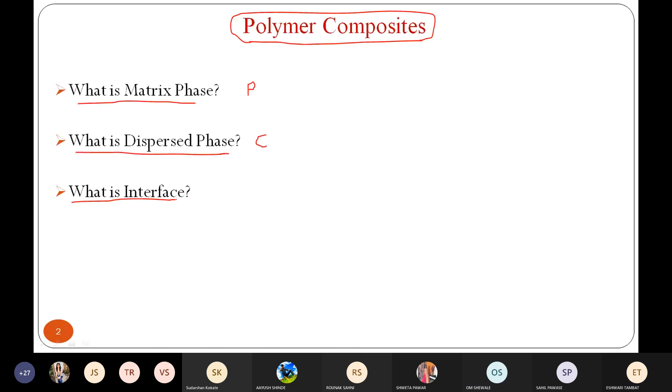And the last concept is interface. Interface means the boundary between the matrix phase and disperse phase. This question is sometimes asked in MCQs for match the pair. So matrix phase is matched with polymeric material, disperse phase is matched with composite material, and interface is matched with the boundary between the matrix phase and disperse phase.

Right? So is that clear? Yes. Yes. Okay, yes sir.

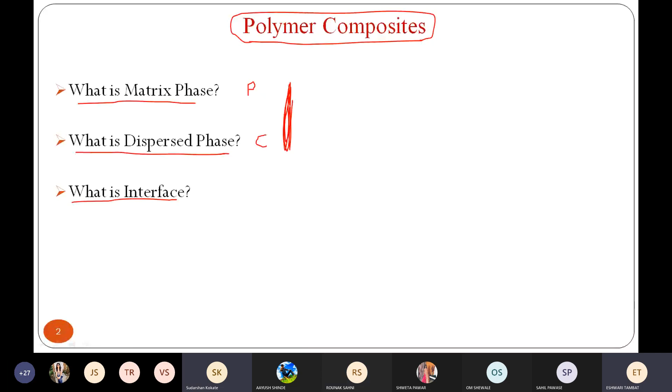Now the next important concept is constituents in the polymer composite. There are two different types of constituents present in polymer composite. The first important constituent present is the polymer matrix phase. Polymer matrix phase includes only metals and polymeric materials used as matrix material - metals like aluminum, copper, and commercial thermoplastics and thermosetting plastics are generally used as matrix phase. The thermo-softening type of plastics and thermosetting type of plastics.

In the previous class, I already explained the concept of thermo-softening and thermosetting polymer materials. Thermoplastic examples include polyamide, polyolefins, polyphenols - these are thermo-softening type plastics, meaning on heating they can be molded and regain their original position. Thermosetting plastics cannot be reused or remolded - once heated, they undergo permanent deformation. That is thermosetting type polymeric material. The well-known examples of thermosetting polymeric material are epoxy resin, phenolic resin, and polyester - these are thermosetting type polymeric materials.

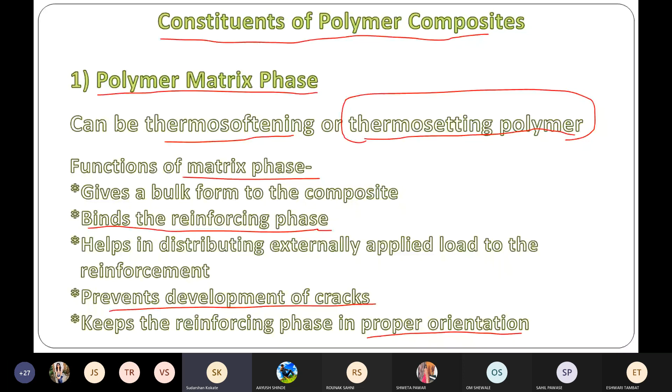Now important MCQs will be asked on this constituent. The first MCQ will be like: in polymer matrix phase, dash dash is used as a constituent. The options are thermosetting plastic plus copper, or thermosetting plastics plus aluminum - metal plus polymeric material. This is used as the constituent in the polymer matrix phase - thermosoftening plastics and thermosetting plastics plus aluminum and copper. These metals are also used in the polymer matrix phase.

And in the disperse phase, or reinforcing material, dash dash is used as a constituent. The constituent is aramide, glass, carbon, silicon carbide, aluminum oxide, boron - some fiber reinforcement material. This is used as a constituent for the reinforcing or disperse phase in the polymer composite. These two types of different questions will be asked.

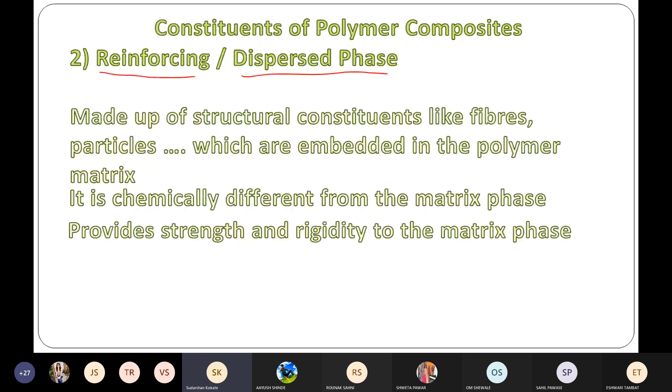Is that clear? Now the next important concept is classification of the composite. Based on reinforcement, composites are classified into three main types: first is fiber reinforcement composite, second is structural composite, and third is particulate composite. These are the three important types of composite. Fiber reinforcement composite is again of three types. Then structural composite is of two types: sandwich and laminar. And third is particulate composite. This is the classification of the composite.

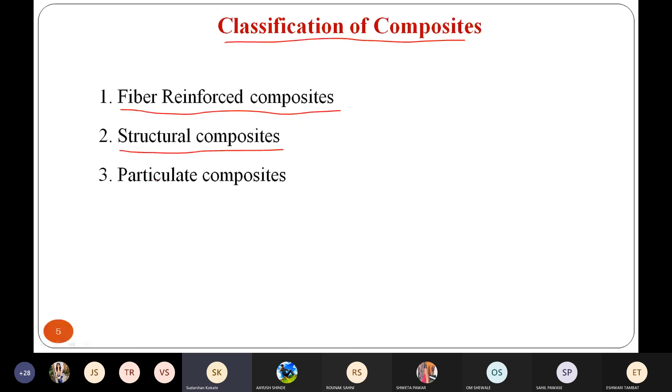Now we will see the first one, fiber reinforcement composite. These fiber reinforcement composites are composed of fibers, which are embedded in a matrix material. The well-known examples are glass, carbon, and aramide fibers. Fiber reinforcement composites are further sub-classified into three main types.

The first is continuous aligned - meaning the arrangement of the polymer chain is in parallel order. The second type is discontinuous aligned, where the polymer chain is parallel but not in continuous mode - there is a break in the polymer discontinuous alignment material.

Then the third is discontinuous randomly oriented. Here the polymer chains are parallel as well as in lateral order, but their direction varies from layer to layer. This is called discontinuous randomly oriented - this is an important one.

Mark this as important - this question will be asked as a match the pair. Suppose diagrams A, B and C are given, and we have to match them. A is matched with continuous aligned. B is matched with discontinuous aligned. And C is matched with discontinuous randomly oriented. This is marked important - it will be asked in the MCQ to match the fiber reinforcement composite on the basis of their figure. Is that clear up to this point?

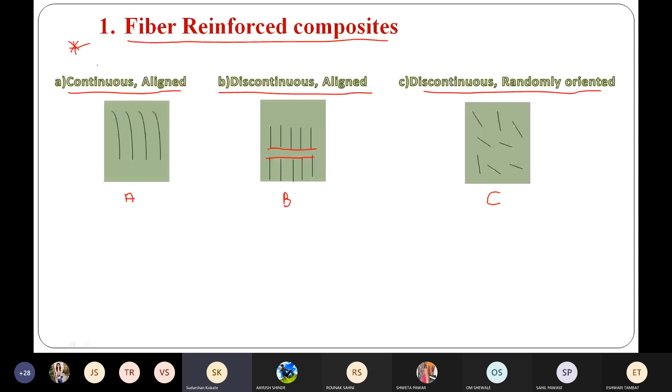Now the next important point is structural composite - the second type in the classification of composite material. Properties of the structural composite depend not only on the constituent material present in the polymer, but also on the geometrical design formation. So there are two different types of structural composite: the first is laminar composite, and the second is sandwich composite.

The first type is laminar composite, and second is sandwich composite. An example is plywood - plywood is an example of laminar composite material. Their direction also varies from layer to layer in laminar composite, and this material has very high strength in a particular direction. Sheets are arranged in such a way that the direction of their strength varies from...

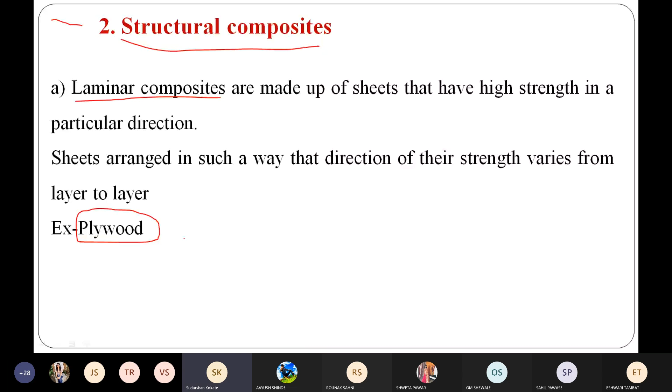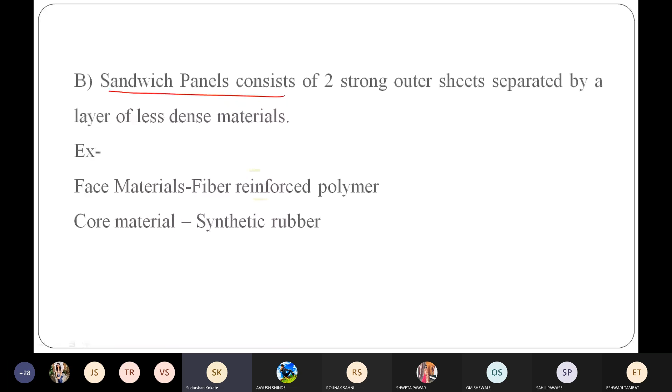Layer to layer. Then the second type is your sandwich panel, which consists of two stronger outer sheets separated by a layer of less dense material. The well-known example is fiber reinforcement polymer and synthetic rubber. This is the two different types.

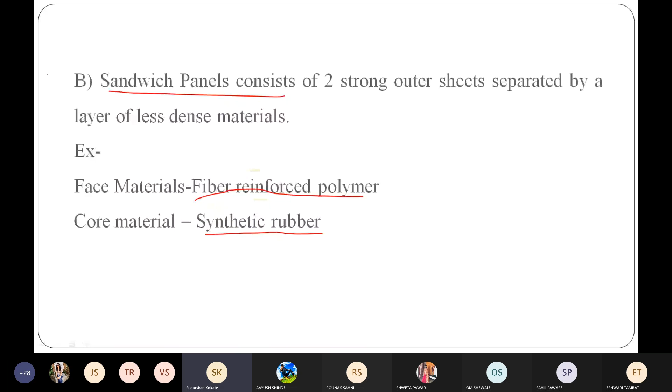I think up to this point in the previous class we have completed, right? Yes sir. Now the third important type is particulate composite.

These particulate composites are composed of particles which are distributed or embedded in the matrix body. These particles may be in the form of flakes or powder, like carbon black powder or reinforced rubber. This is the example of particulate reinforcement polymer composite.

These are composed of particles distributed or embedded in the matrix body, and these particles may be in the form of flakes or powder. The well-known example is carbon black reinforced rubber. This is the classification of polymer composite: three different types, that is fiber reinforcement, structural composite, and particle composite.

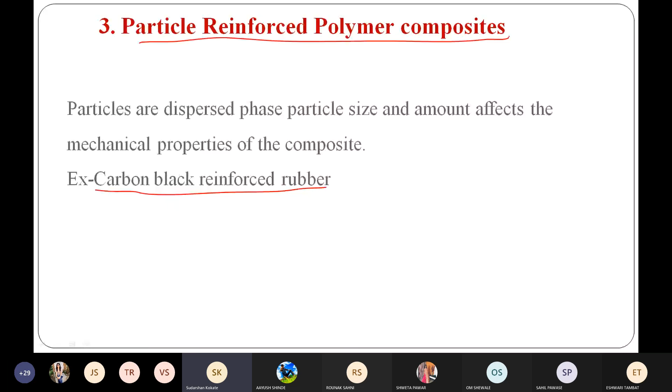Now the next important concept is the different properties. Due to the uniqueness in the properties of composite material, it can be useful in different fields. So what are those properties? The first property is that composite material is also having high tensile strength.

Why does composite material also have high tensile strength? Because we are adding different constituents into the polymeric material, and due to this it can impart certain definite properties into the polymeric material, and therefore it also has very high tensile strength.

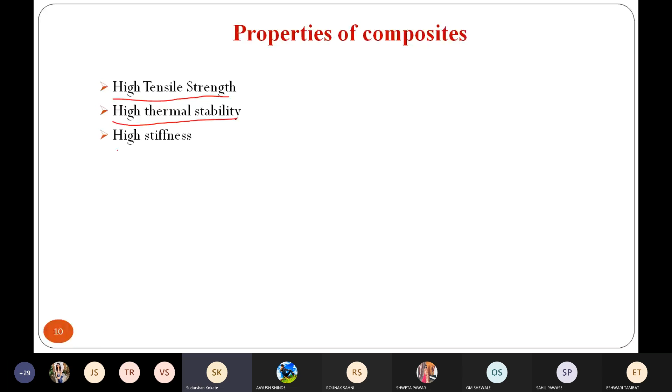The second important property is that the polymeric or composite material is thermally stable. This is important. Then this composite material also has high stiffness, meaning in Marathi we call it 'kadakpana'. So this polymeric material also has high stiffness as a mechanical property of composite material.

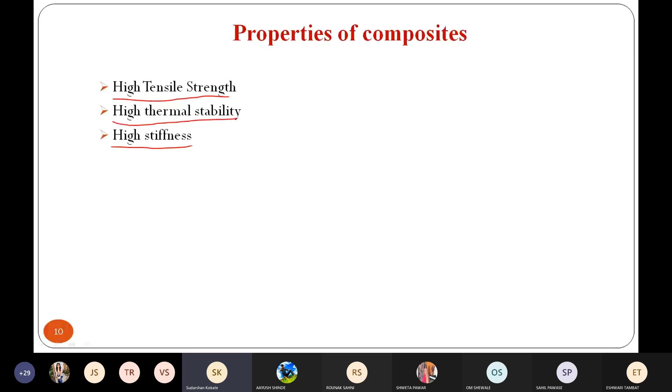Then this composite material also has very low thermal expansion. Again it is highly resistant, that is oxidation resistance. Composite material is oxidation resistant, and this composite material is also abrasion resistant.

What is abrasion? Abrasion relates to the swelling property of the polymeric material. For example, for making shoes we can use a leather sole, right? Leather is more abrasion resistant because it cannot easily swell. But if you use another sole instead of leather, it cannot resist because it has poor abrasion resistance.

Similarly, the properties of composite material also include very high abrasion resistance. Abrasion means the swelling property of the polymeric material. So this is an important and interesting property of the polymeric material.

I will again repeat the properties of composite material: it has high tensile strength, is thermally stable, has high stiffness as a mechanical property (which we call 'kadakpana'), has low thermal expansion, high oxidation resistance, and is highly abrasion resistant, which is the swelling property of the polymeric material. These are the important properties of polymer composites.

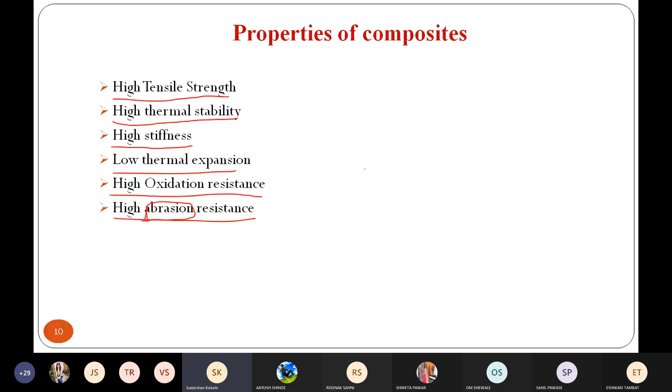Now, types of fiber reinforcement polymer composite. This is important; MCQs will be asked based on this. There are two main important types of fiber reinforcement polymer composite, FRP. The first one is glass fiber polymer composite, and the second one is carbon fiber reinforcement polymer composite. These are the two important types.

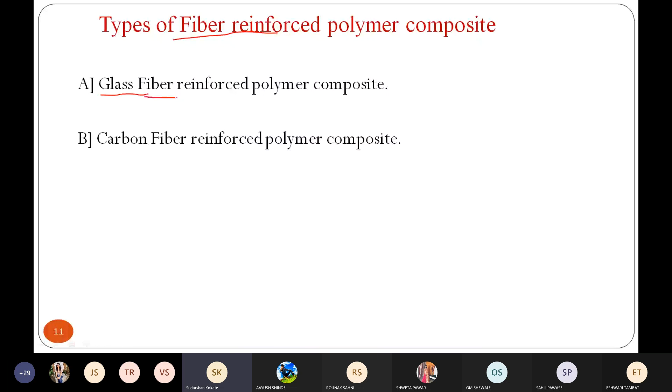Now what is glass fiber? Glass fiber reinforced in the polymer matrix phase containing nylon and polyester is known as glass fiber reinforcement polymer composite. The word is self-explanatory: glass fiber reinforced in the polymer matrix phase containing nylon as well as polyester is known as glass fiber reinforcement polymer composite.

Now the second type is carbon fiber reinforcement polymer composite. Here, carbon fiber is reinforced in the polymer matrix like epoxy or polyester resin, and this is known as carbon fiber reinforcement polymer composite.

I will repeat: in glass fiber, glass is reinforced in polymeric material, and in the second case, carbon fiber is reinforced in a polymer matrix phase like epoxy or polyester, known as carbon fiber reinforcement polymer composite.

This is important; sometimes for matched pair questions, this will be asked: glass FRP and carbon FRP. FRP means what?

Fiber reinforcement polymer or fiber reinforcement plastics. In glass FRP, glass is the reinforcing material in the polymer matrix phase, and in carbon FRP, carbon is the reinforcing material in the polymer matrix phase. This is important, based on this MCQs will be asked.

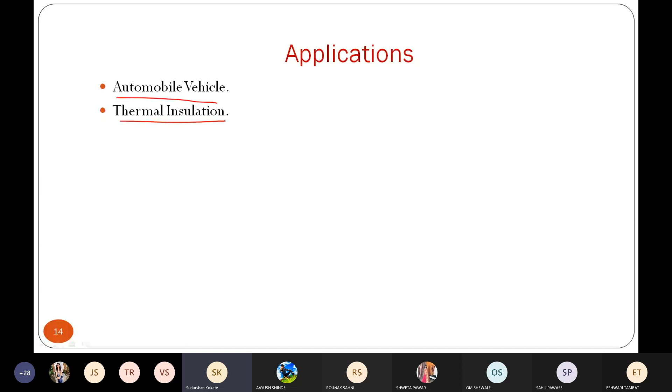Another important application is making various automobile parts. It can also be useful for storage tanks, industrial flooring, and plastic pipes. For these purposes too, glass fiber polymer composite material can be useful. These are the important applications of glass fiber polymer composite.

Now the second important type is carbon reinforcement polymer composite. What is carbon reinforcement polymer composite? Carbon fiber is reinforced with a polymer matrix, such as epoxy or polyester resin, and then it is known as carbon reinforced polymer composite. Now, how is it prepared?

The carbon fiber is prepared from polymer such as polyacrylonitrile and rayon. From this we can easily prepare the carbon polymeric material. On pyrolysis of cellulose as well as acrylonitrile, even rayon is used, from that we can obtain carbon fibers.

Now, what are the properties? Same properties as...

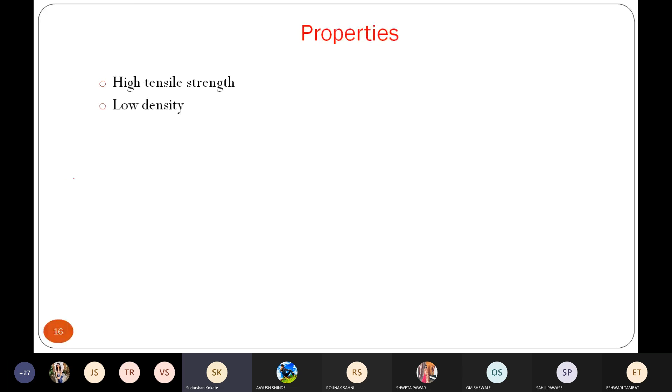Your composite material has high tensile strength, low density, resistance to corrosion, high thermal conductivity, high temperature resistance, and high elastic modulus, even resistance to chemicals. These are the same properties of your polymer composite material, specifically carbon fiber reinforcement polymer composite.

The only limitation is that its cost is higher compared to glass fiber. Now let's look at the different applications of your carbon reinforcement polymer composite.

This carbon reinforcement polymer composite has the strongest demand in the aircraft industry, because it is a very tough material as well as lightweight. So the strongest demand for carbon fiber reinforcement polymer composite is in aircraft, aerospace, and the automobile industry. This is the first important application.

The second important application of carbon fiber reinforcement polymer composite is in laptop shells and other high performance devices. This polymeric material is also useful for making sports equipment, like tennis rackets, archery equipment, and racing bicycles.

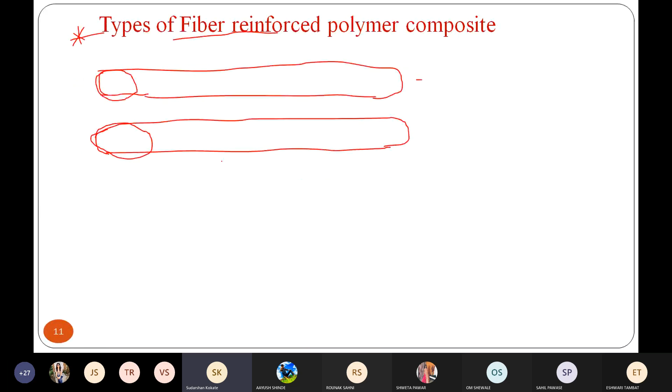I will repeat this important point. There are two different types of fiber reinforcement polymer composite. Number one is glass fiber reinforcement polymer composite, and number two is carbon fiber reinforcement polymer composite.

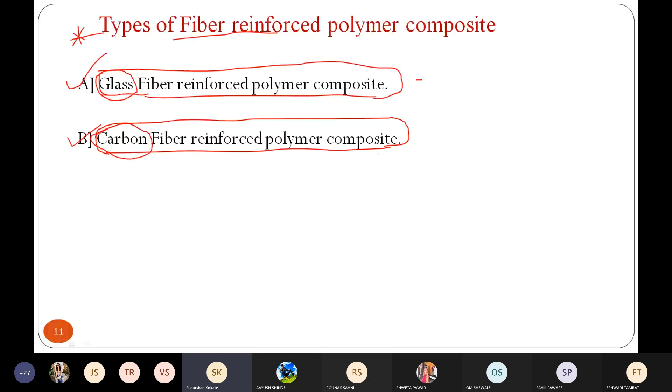In the first case, glass is reinforced with a polymer matrix phase, known as glass fiber reinforcement polymer composite. In the second case, carbon is reinforced in a polymer matrix phase, known as carbon fiber reinforcement polymer composite. We will see their preparation, properties, limitations and application one by one.

Glass is reinforced in a polymer matrix phase, which contains either nylon or polyester compound. It can be prepared by forcing the glass melt through a spinneret, which contains small holes, rapidly pulling and cooling it to get fibers. A small thread is obtained, and that thread is nothing but glass fiber, which makes glass fiber reinforcement polymeric composite material.

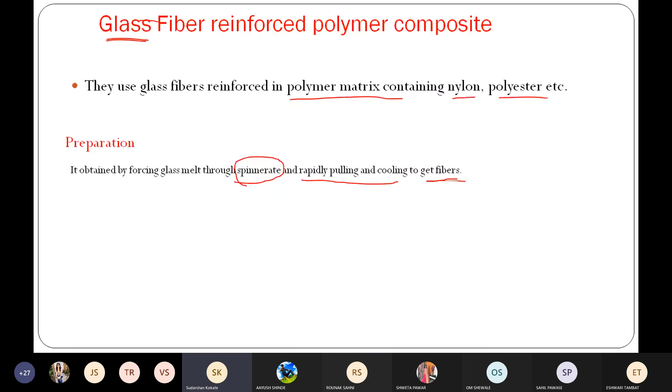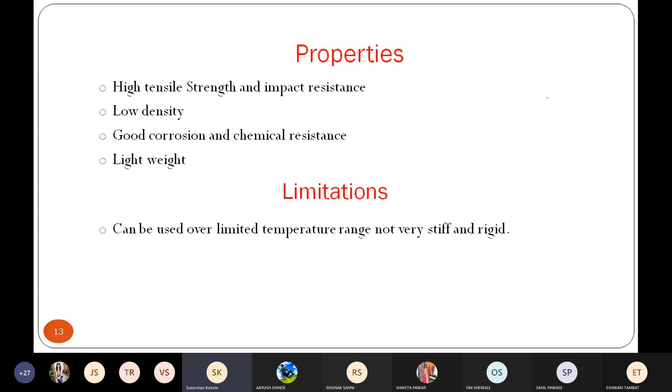Its properties are the same as composite material: high tensile strength, low density, resistance to corrosion, chemical resistance, and lightweight. Only it cannot be used at high temperature; it works only at a limited temperature range.

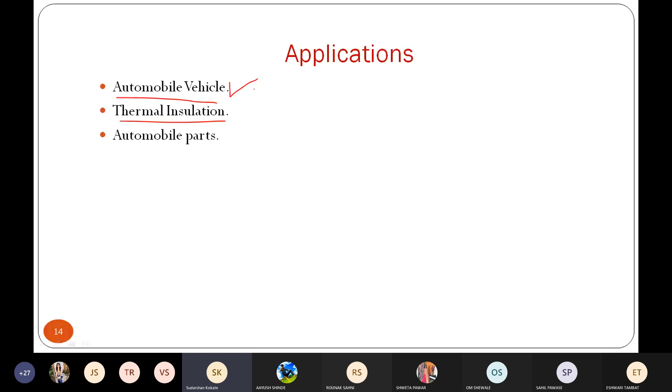Its applications are in the automobile sector, thermal insulation, and automobile parts making. In automobile vehicles it is used because it is a very lightweight material, and if the weight of the vehicle is reduced, the fuel efficiency goes on increasing. That's why glass fiber reinforcement polymer composite is used in the automobile sector.

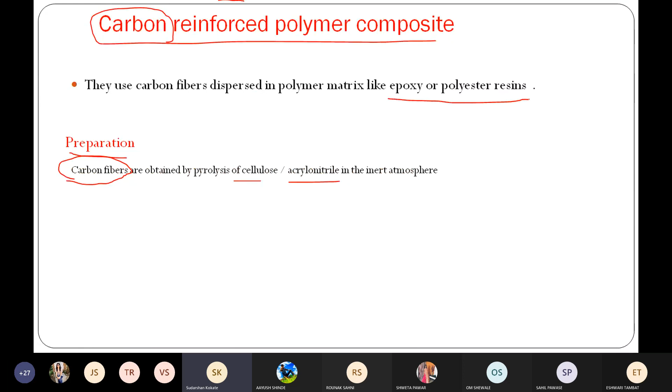The second important one is carbon reinforced polymer composite. Carbon is reinforced with a polymer matrix containing epoxy or polyester resin. It is obtained by the pyrolysis of cellulose or acrylonitrile in an inert atmosphere.

Its properties are the same as composite material: high tensile strength, low density, resistance to corrosion and chemicals, thermal conductivity, resistance to temperature, and high elastic modulus. The only limitation is that its cost is greater than glass fiber.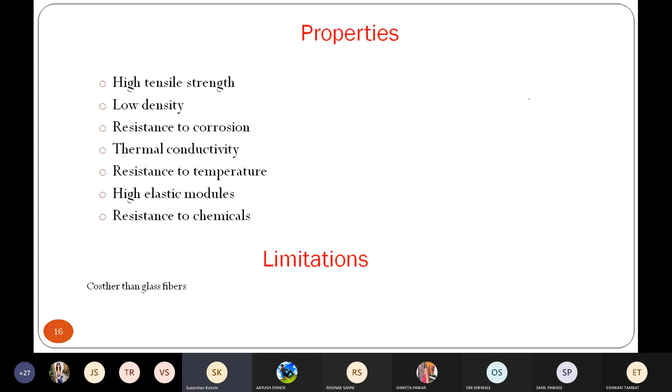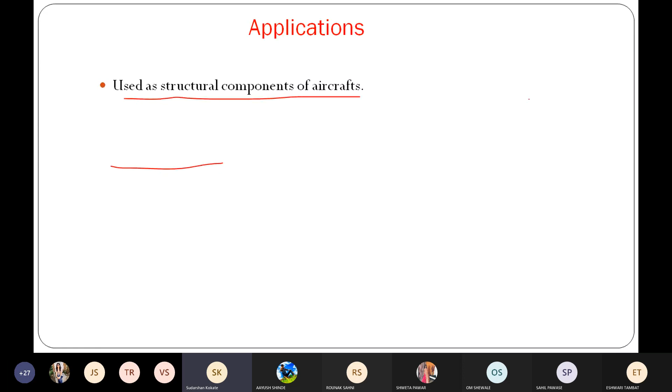Its application is in making structural components in the aircraft industry and aerospace, because it is very light and tough material. That's why it is used for making structural components in the aircraft industry.

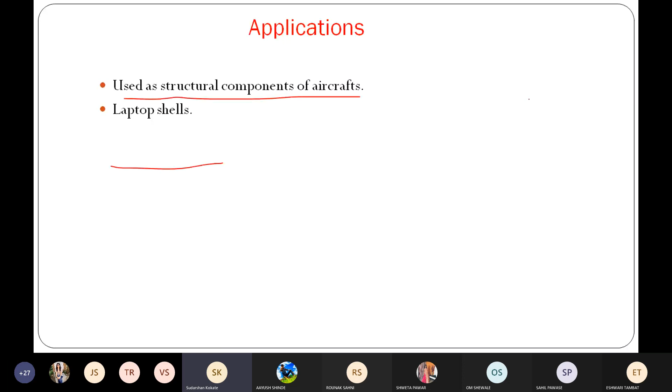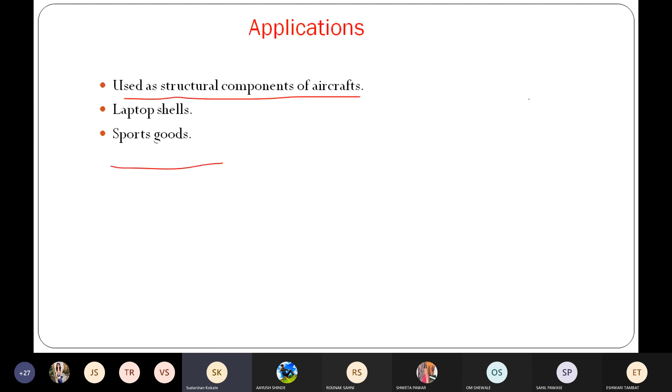It is also useful for making laptop shells and other high performance devices, and for making sports equipment like bicycle parts, archery equipment, and tennis rackets, which are obtained from carbon fiber reinforcement polymer composite material. It is also used for making musical instruments like violin and guitar, and is useful for fabrication purposes.

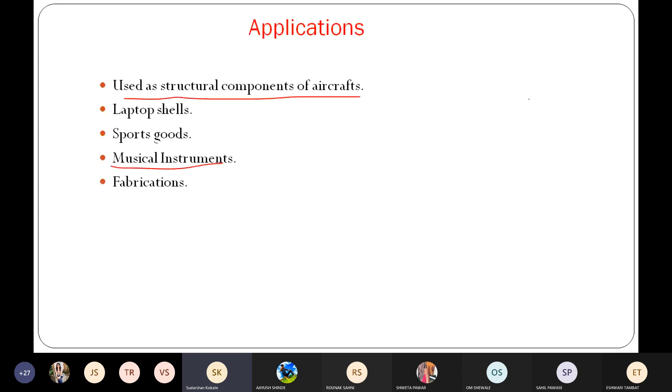So is that clear to you? Polymer composite, yes. Any difficulty regarding the polymer composite?